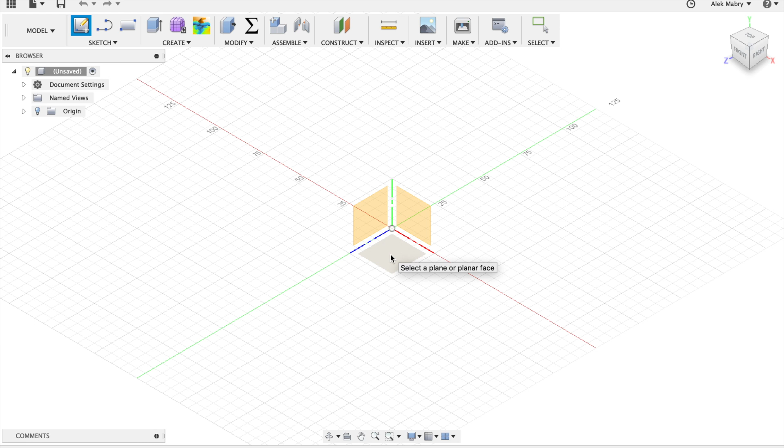Now that you're able to draw the sketch, you can move around the view by holding the middle mouse, and it will pan your view around. You can also rotate your view by pressing middle mouse and shift. And you can zoom in and out with the scroll wheel. You can also click on this box right here to rotate your view around, or you can click on the individual sides of the box.

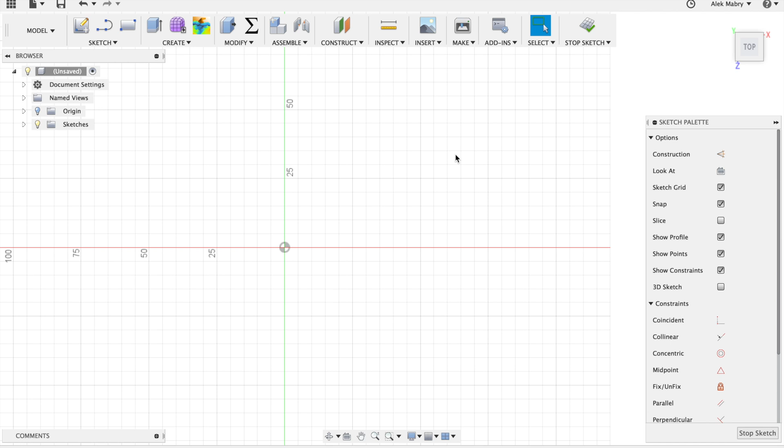If you're on a Mac or you're using some kind of a trackpad, you can use two fingers as a replacement for the middle mouse. So if you use two fingers and then drag with shift, you can rotate around. And if you use two fingers just by themselves, you can pan your view. And if you like to zoom in and out with a Mac, you can use two fingers and pinch in order to zoom in and out.

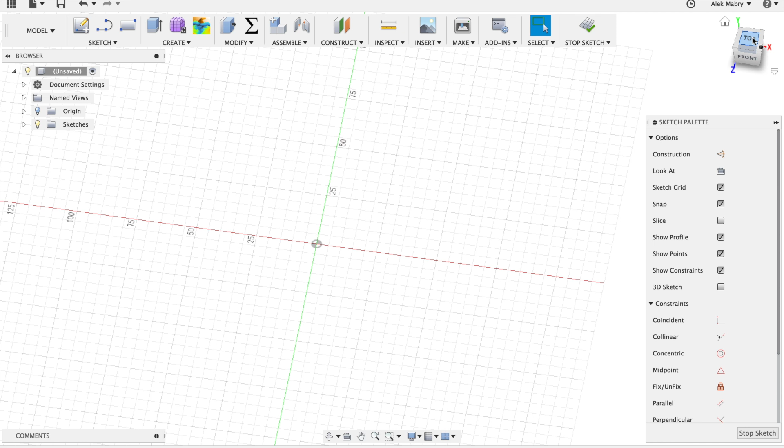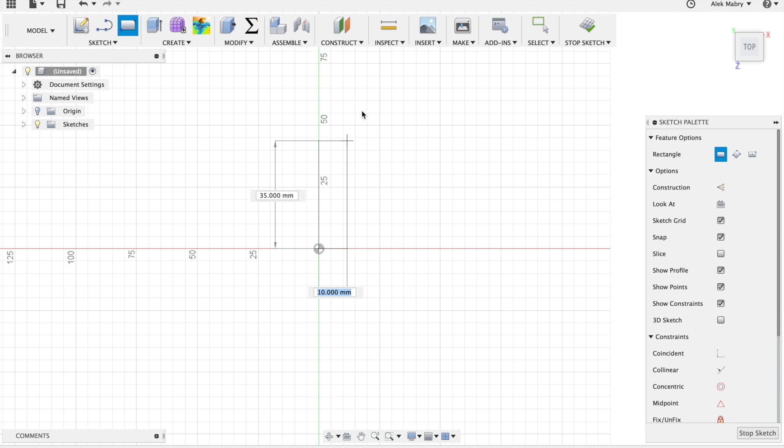So now that we're in the sketch menu, let's start drawing. Go up to the sketch palette. You can select the 2-point rectangle from here, or you can go down into the rectangle tab and click 2-point rectangle, or you can also memorize the button that you need to press to bring up the rectangle. So I'll just click here, and then I'll click 2 points starting from the center point. And you can click these anywhere you want. We can set the dimensions after.

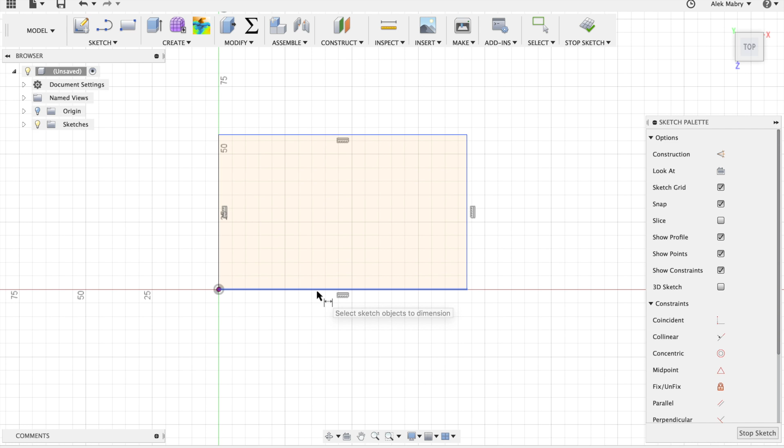Now that you have your shape complete, you can bring up the dimensions tool. So go to Sketch, and then go down to Sketch Dimension, or you can press D. And now you can select a side and add a dimension to it. So I'll select the bottom side, and then I'll add a dimension of 200 millimeters. And now I'll select the left side and set it to 150 millimeters.

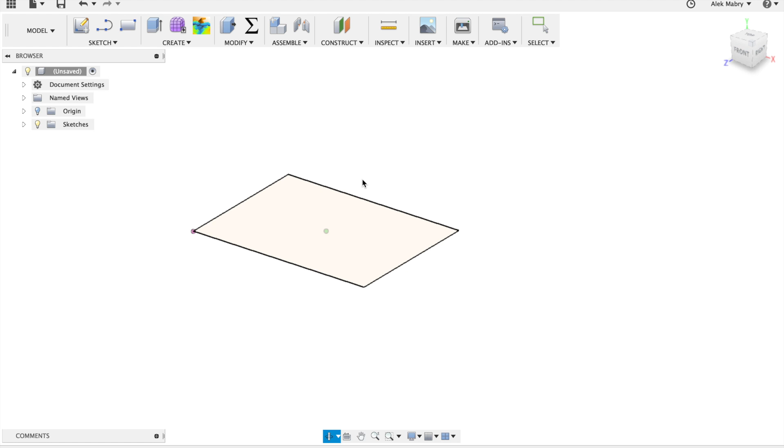And now I'm done with the sketch. I can press Stop Sketch. And I can rotate my view around, again with Shift and middle mouse.

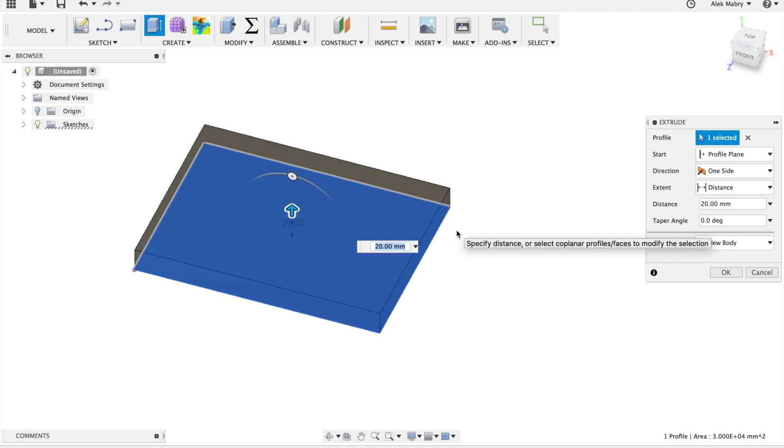Now I can click the Extrude button right here, select the sketch plane, and now I can drag to change how much it extrudes. In this case, I'd like the sign to be 1/2 inch in thickness, so you can actually use different dimensions or different units here. You don't have to use millimeters, so I can type in 0.5 inches, and it will automatically use inches for this dimension.

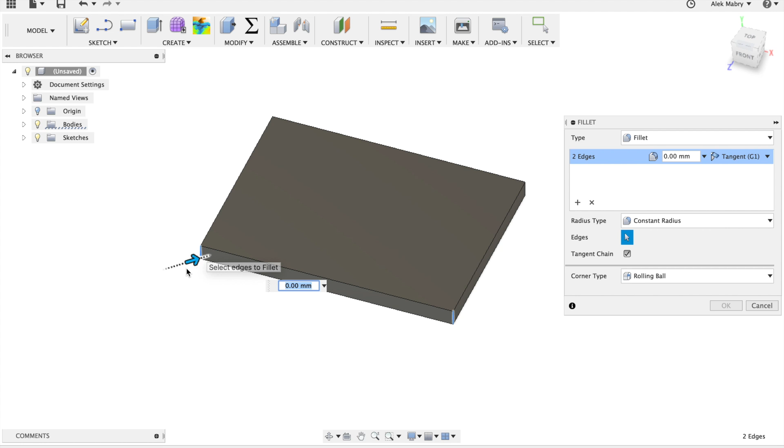Now I want some rounded edges on my sign, so I can go to the Modify tab and open up the fillet. Now I'll select this edge, this edge. You don't have to hold shift when you're selecting multiple edges, you can just click on them. This edge and this edge. If you accidentally choose another edge, you can just select it again to deselect it.

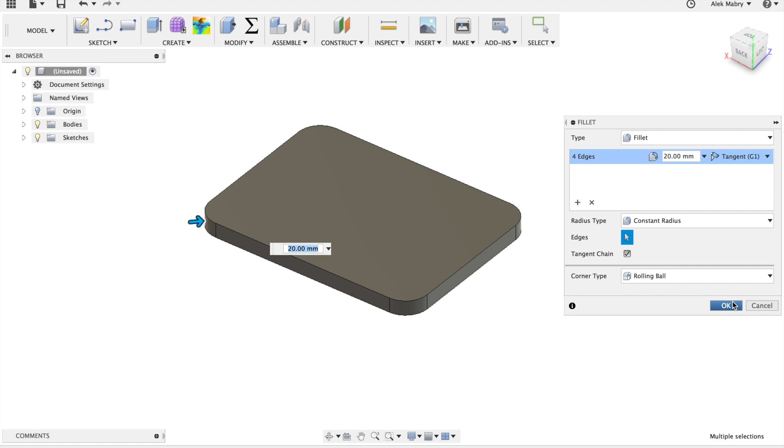Now you can push in this arrow right here to add the fillet. I will make it 20 millimeters. You can also type it in through here on the right window. Just press OK. Now I'll line back upright again.

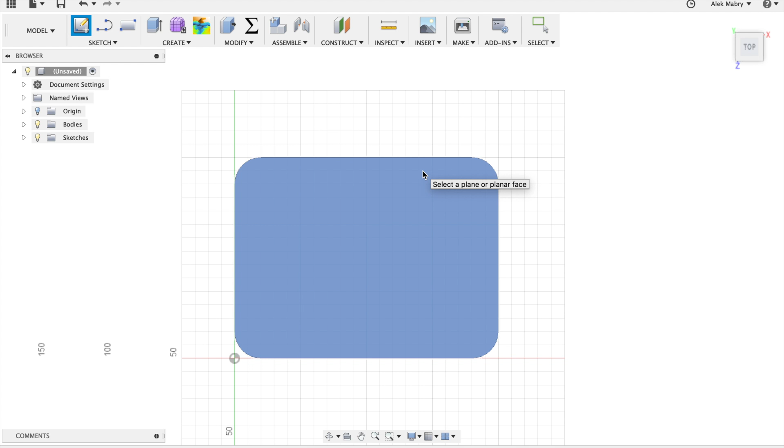Now I'd like to make an inset right here. So I'll start by making another sketch. And while last time we started with the bottom plane, we now want to sketch on top of our existing surface. So I'll click this as the plane. Now I can add a 2-point rectangle. Again, I'll just kind of put it wherever. It's not too important at this stage.

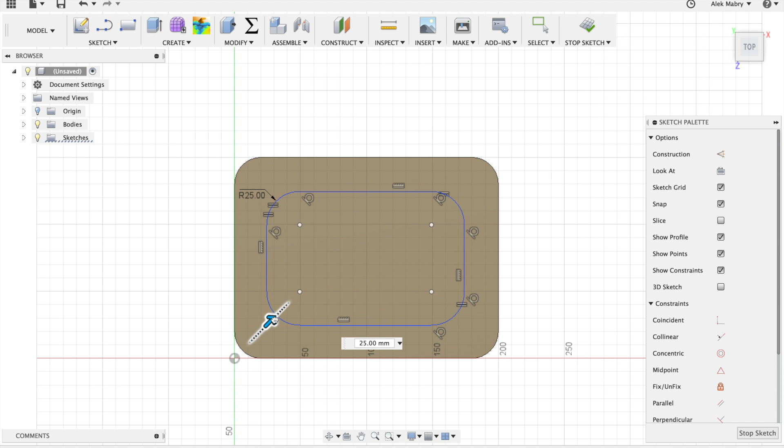Then I can go to the sketch section and choose the fillet once again, and I can select the points that I'd like to fillet. So I'll click the first point, and now holding shift, I'll select the other 3 points. And now I can drag in the fillet, and I'll set it to 10 millimeters.

Now I'd like to make it a uniform distance to the edge on all sides. So I'll bring up the dimension tool again. Another way you can bring up the dimension tool other than going up here every time is if you right click, hold, and then you drag down, you'll see that you can select different tools. So in this case, this sketch dimension tool is on the left for me.

I can also get to the same tool by dragging out the shape that I want, and it will bring up my tool, sketch dimension. Or if I drag down again to sketch, you can see I can also select the 2-point rectangle like so. So sketch dimension, 2-point rectangle. So I'll use the sketch dimension again, and I'll select the first edge, and I'll select the second edge, and I'll set it to 10 millimeters.

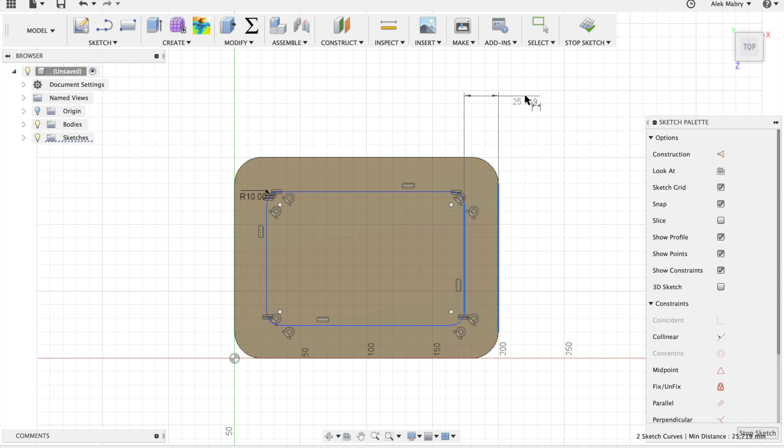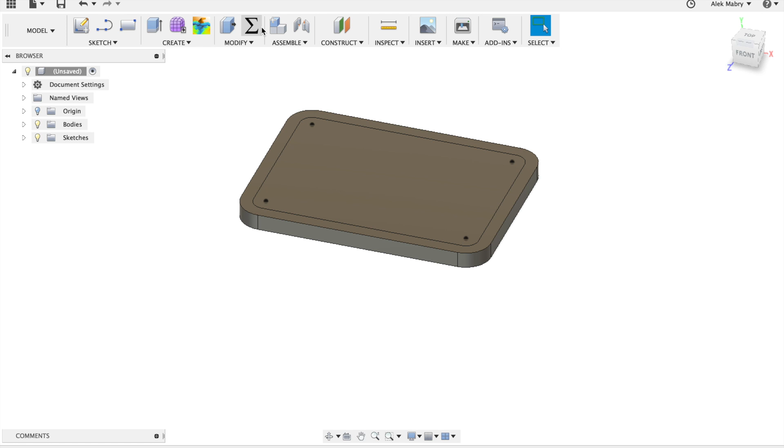And then I'll repeat this step for all of the edges, or all of the frame, I mean. And then again, I'll stop the sketch. And I want to extrude this downwards this time. So I'll choose the extrude option once again, select the middle plane, or the middle sketch, and now I can drag it into the surface and it will cut away. And I'll cut away 1/4 inch. And I just hit enter there to submit it.

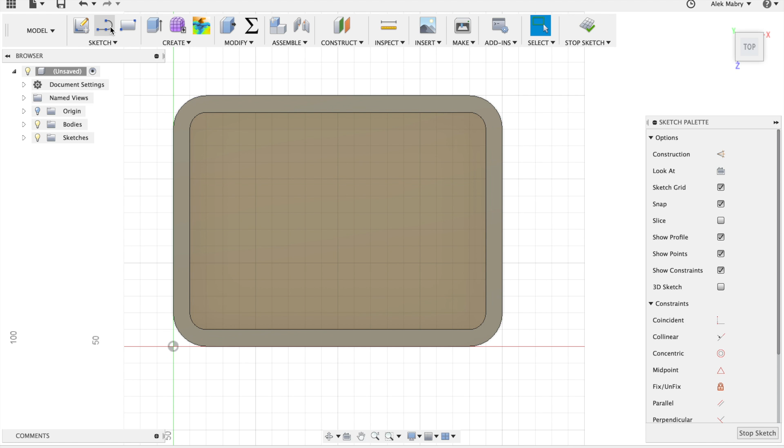Now it's time to draw the logo in the center. So we'll make another sketch on the center surface. And we'll use the line tool. So draw just kind of a triangle. Doesn't have to be perfect. And now we need to draw a midpoint line because our triangle needs to be symmetrical on both sides.

So if you go up along this top line here and drag your mouse, you'll see that these little icons start popping up. When you get to the point where there's a triangle, this means you're at the midpoint. So click once, and then on the bottom side, drag your mouse along till you get to the midpoint, and you see the triangle again. Click again, and you can see this is now our center line.

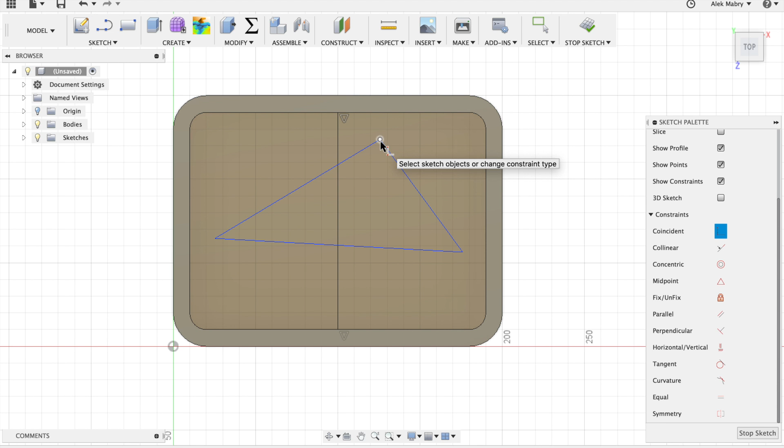Now it's time to make this triangle symmetrical. So on the right side, there's a sketch palette full of constraints. If you don't see it, you have to press the double arrows. Now if you drag down to the bottom of the sketch palette, you can select one of these constraints. So in this case, I want this point to be on this line. So I'll click the coincident constraint. You can see the icon shows that's what it does. So I'll select the top point, then I'll select the line.

Now I want a symmetry constraint, so click the symmetry. I'll choose the 2 points first, and then I'll select the midpoint line. And now I'd like to make sure that this bottom line is always parallel with this bottom edge, so you can use the parallel, select the bottom edge, and then that edge. Now you see right here, it says sketch geometry is over constrained. That means that I don't actually need a parallel constraint right here because it can figure out that it should be parallel based on these 2 symmetry constraints.

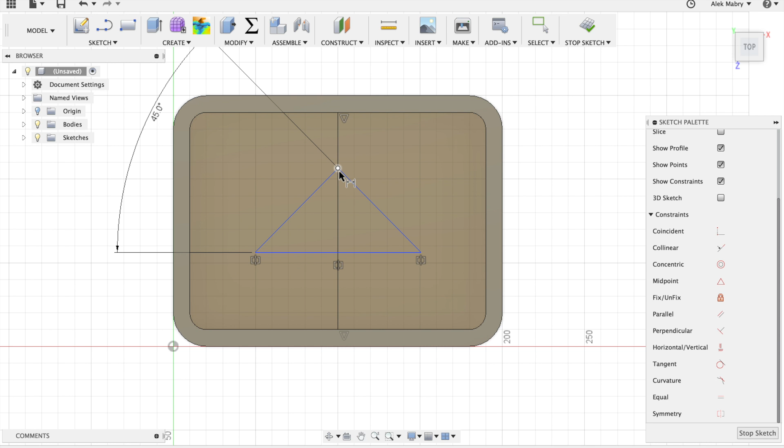So now I will add another dimension. So bring up the dimension tool, and then I'll select this edge and this edge. And I can drag out, and I'll set it to 45 degrees. So now you can see it's automatically updated the other edge as well because it's symmetrical. And now I'll add a dimension from this point to this top edge. And I'll set it to 10 millimeters.

And now I'll add one last dimension on the bottom, and I'll set this to 115 millimeters. And as you can see, I don't need to add another dimension right here because of the constraints. You also notice that all of the lines are black rather than blue. Black means they're fully constrained. If you select them, they can't be dragged around. So now I can press stop sketch.

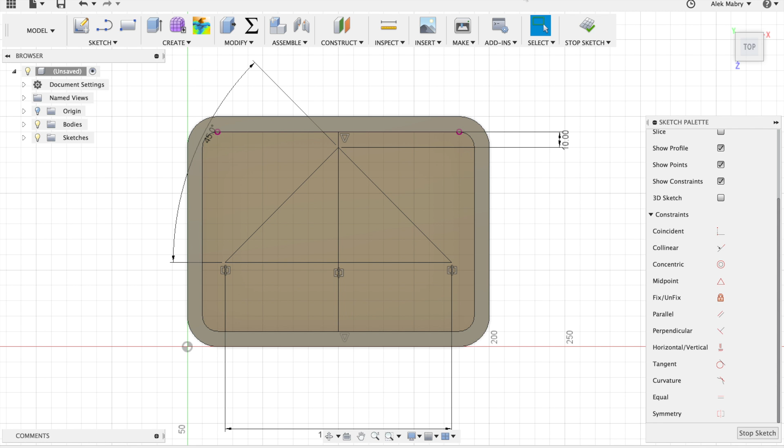And this time I will extrude it upwards again. And you can select 2 points just by clicking on them, or 2 surfaces by clicking on them. Drag upwards and then set that to 0.125 inches.

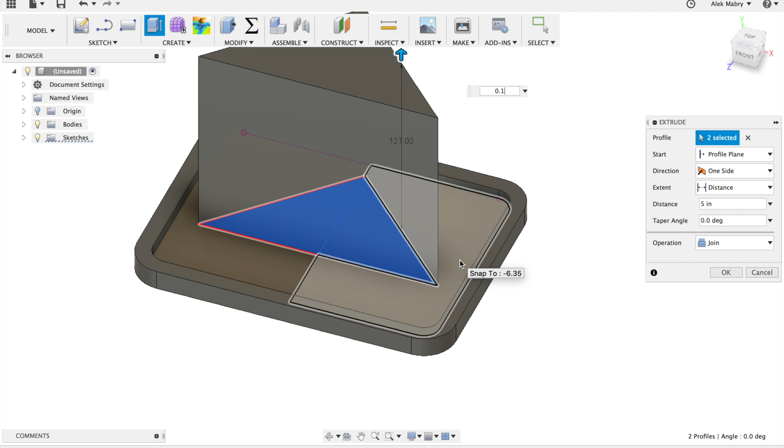0.125 inches, so 1/8 of an inch. And now I'll make the final layer on top of this one. So I'll start with the midpoint line for the symmetry, so I'll click here, and then drag down.

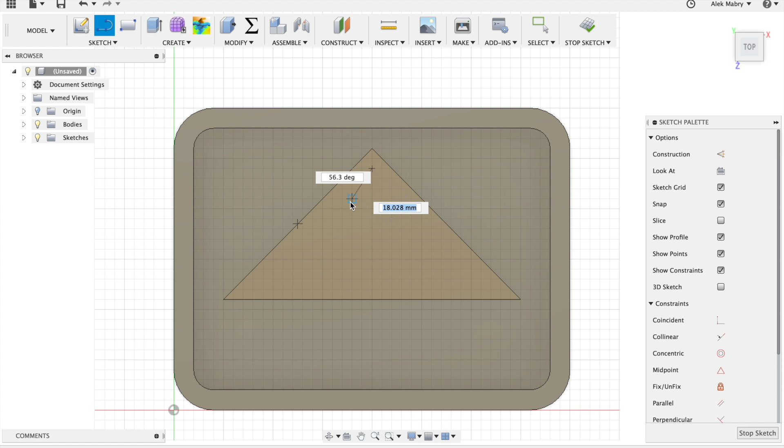And actually, never mind, I won't. So now all we have to do is detail half of the triangle this time, and I'll show you how to symmetrically mirror it over in another step. So bring up your line tool again and draw just sort of a triangle.

And now you can draw just a shape like this. And then I'll also add, of course, a midpoint line just to make sure this surface gets lined up correctly. And now you can see, because they're blue, that means they're unconstrained. So I can click on them at any point with my mouse and drag them around.

So the first step is to use the collinear constraint to constrain this triangle to here. Then I'll use the collinear to constrain this edge and this edge. Then I'll use the parallel constraint to constrain that to that.

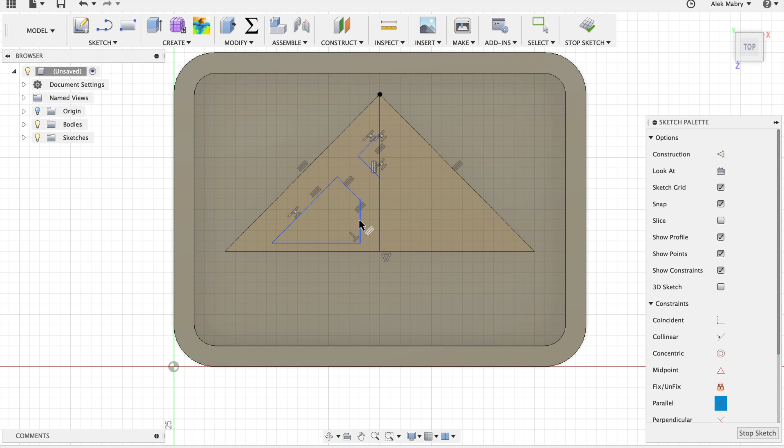Now I can start adding dimensions. So if I bring up my dimension tool, I'll select these two edges and set them 4 millimeters apart. Select these two edges, those will be 4 millimeters apart. This and this are 4 millimeters apart. And you see, once I add this, the other one has updated as well because they're on the same line. They're collinear.

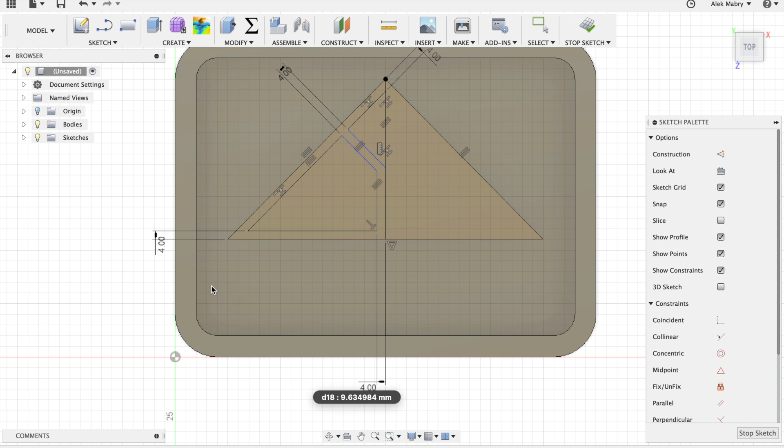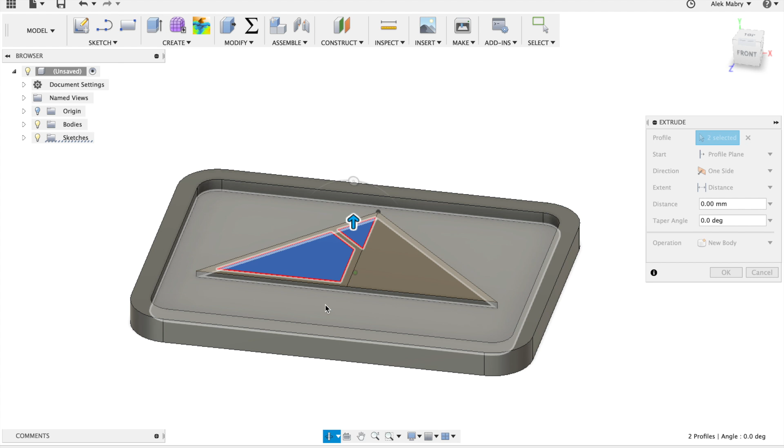So now I get to decide what shape this is, or how large this is. So I'll bring up the dimension tool again, select here, make it 22 millimeters. And now the shape is fully constrained. So I'll stop the sketch, I'll extrude it, and I'll make it 0.125 inches.

And now I want to mirror this to this side. So the way you can do that is by making a plane. So previously, when we started the drawing, you could see these planes, the front plane, the top plane, the right plane, the left plane. But now I want to make a plane in the middle to copy one detail to the other side.

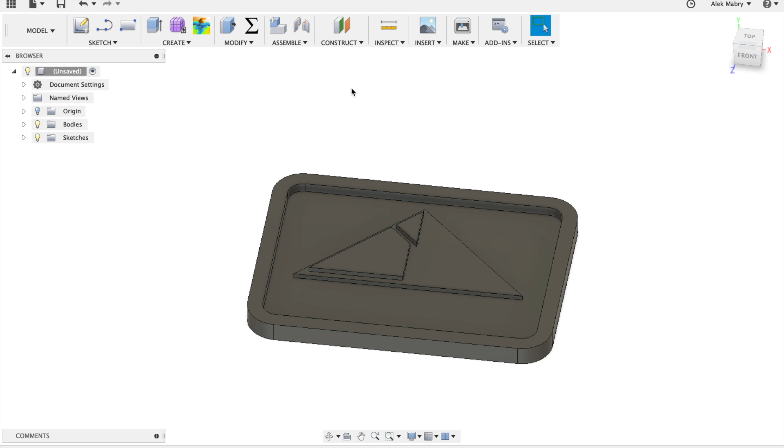So I can go to the Construct tab here, and I can click Midplane. Now I can select this side and this side, and it will make a plane perfectly in the middle. Now I can go to the Create tab, and then go to the Mirror tool.

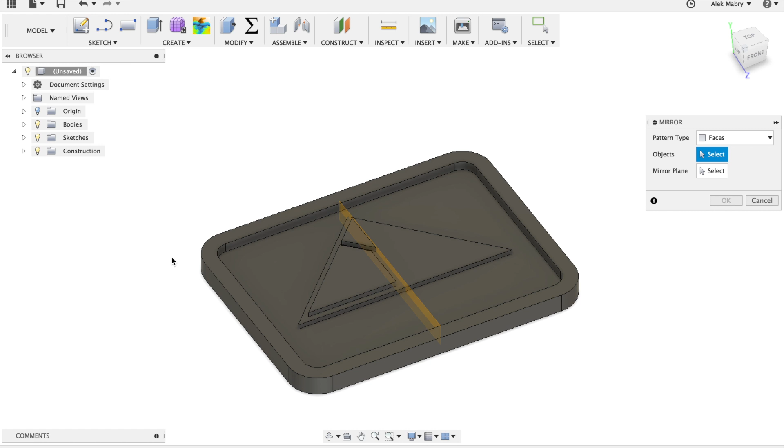Now I can select what I'd like to mirror. So I can either use faces or features. I will use features. And now I can select from this bottom history what feature I want. So the most recent feature that we added was this extrusion. So we're going to copy this.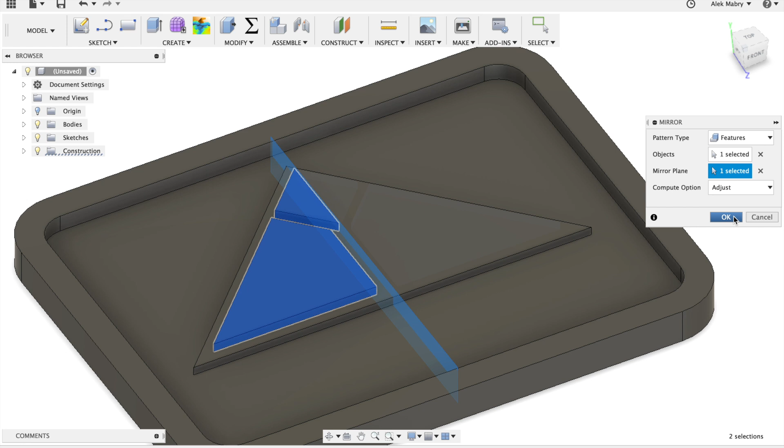And now we can select our mirror plane. And it will copy to the other side, and we'll just click OK. And now it has been copied.

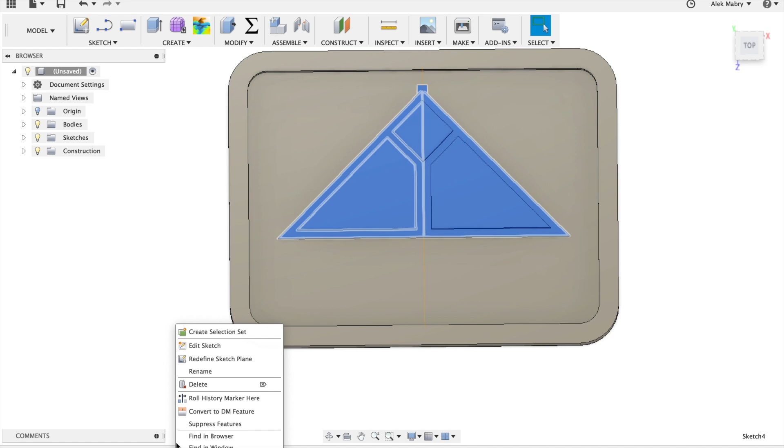Now the nice thing about Fusion is that if at any point we want to go back and change a dimension, like I just noticed, these two are too close to each other, and I want it to be the same thickness as this right here, I can go back into the sketch right here on the timeline. I can right-click and click Edit Sketch. So now I can go back and change any dimensions I like.

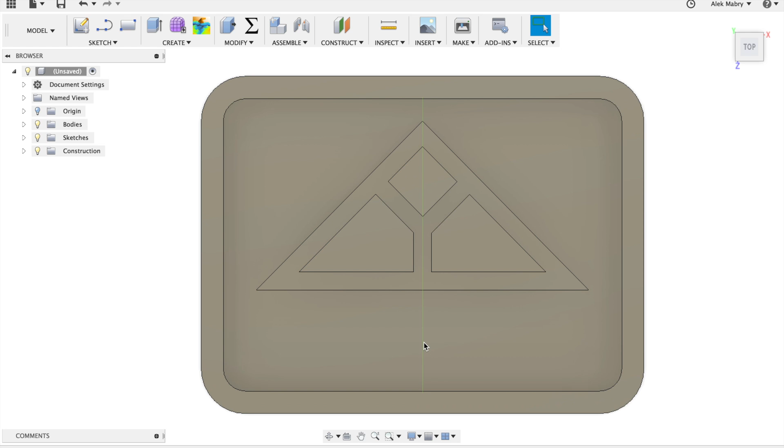So I'd like this to be 8 millimeters. I'd like this to be 8 millimeters. And this to be 8 millimeters. As you can see, the features have all been updated past this point. You can also drag this back in time to see what your model looked like at any stage.

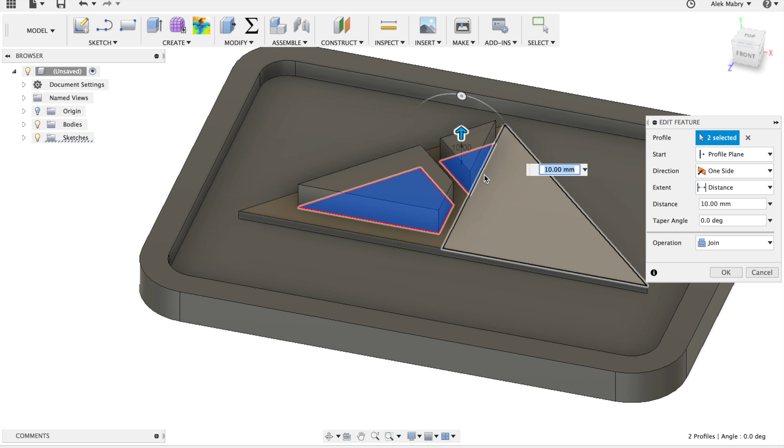Also, say if I wanted to extrude this higher, I could select that feature as well, make it taller, although we still only need it to be 1/8 of an inch. And this is the finished sign. So make sure that you save your document. I'll call this the CyberDyne sign. So in the next video, I'll show you how to set up this model for CNC machining.